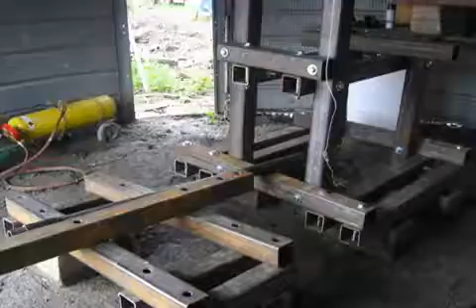Back to the topic, personal fabrication, flexible workshop. Here's our program listed in logical steps: install a metal melting furnace with about 300-pound melting capacity per hour, cast structural steel frame tubing for LifeTrac, cast frame parts for the CEB press.

Cast steam engine blocks. Use the RepRap 3D open source printer in plastic, both to recycle plastics and to create molds for casting of fine parts, such as bushings and hydraulic motors and pumps.

Brief economic analysis shows that our labor in this is worth about $1,000 per person per day in a basic foundry turning scrap metal into useful parts. We are really talking about reducing the cost of the CEB machine tractor down to the cost of scrap metal plus labor plus fuel, which is only about 2 gallons per hour for this particular case.

Our foundry budget is about $100 to $1,000 for the above case in terms of materials to build the foundry itself.

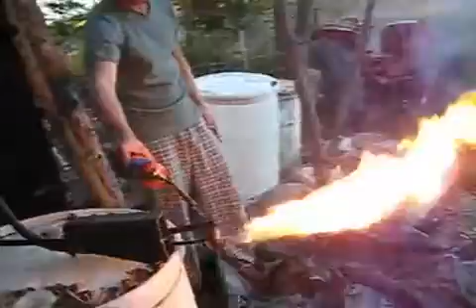We can use the Babington burner to provide the furnace heat. For structural steel, we may be able to use castings directly, such as for the frame of LifeTrac.

For a steam engine, we would have to use a lathe to bore out the cylinder.

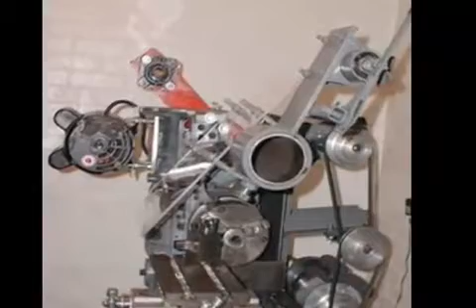The multi-machine is an existing open source tool. It's a universal machining tool which relies on the fact that in any machining operation, either the tool or the workpiece rotates. The multi-machine allows this and thus is very flexible.

We are considering an even more simple turning lathe. Combine our motor mounting, which we've experienced with a LifeTrac rototiller, with a concrete bed with bolts, and add an XY table, tool post, and chuck, and we're done. The motor is already available as part of LifeTrac.

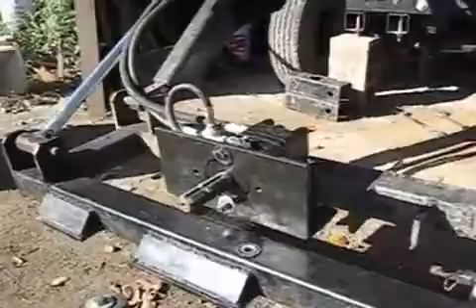This covers the industrial lathe. 20 horsepower of motor is enough to turn railcar wheels.

We can make our shaft pretty heavy, such as 2 1/4 inch, with bearings from Surplus Center at $21 each. Two of those, some metal, a $70 cross slide, and for $300 you have a heavy-duty 12-inch lathe.

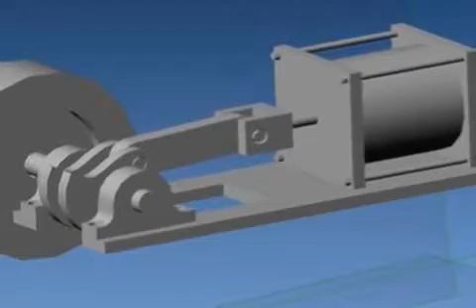See the Bill of Materials on our steam engine page, where the steam engine will be the first application of the lathe. Now, a similar procedure will be used to fabricate a production drill press and milling machine at similar cost.

Once again, LifeTrac hydraulic powered. To this, add CNC drive, computer numerical control, and Linux CNC as the open source control software that's already available.

Next, we move on to the torch table for oxyacetylene or plasma torch cutting. Instructables.com already featured a homemade plasma cutter.

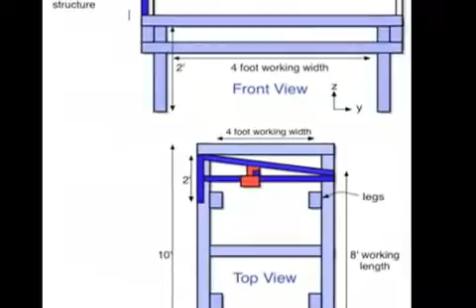On our torch table, progress is still lacking, as we're still building the workshop to house this. The torch table is designed for us to cut all the metal from stock, and in conjunction with casting, provides robust fabrication capacity.

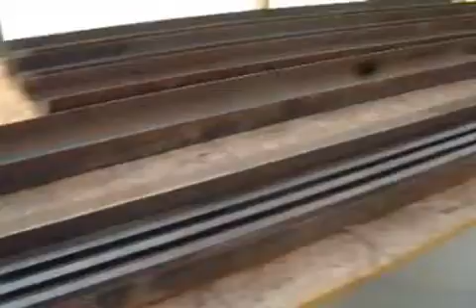Now, with the above, we're looking at 20-hour fabrication times for the CEB machine, and 40-hour fabrication times for the tractor kits.

This is exciting: optimizing production, open sourcing designs, so that someone could build the same fab infrastructure, download a design, and cast or cut all the same parts.

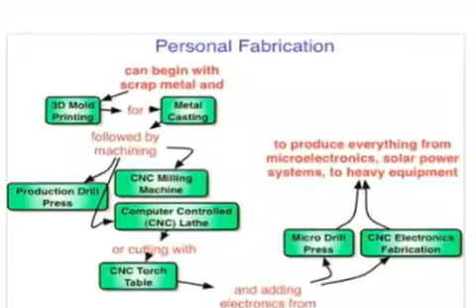This is distributed manufacturing at its best, and we think it's just around the corner for everybody who wants to do this. Last on the fabrication front, there's electronics.

Take a small, very precise version of the XYZ table, like the torch table, and you can etch circuit boards from copper-coated circuit blanks. Then use a micro drill press to drill holes for components, and you can fabricate circuits of all sorts. This is relevant to solar turbine controls, steam engine controls, inverters, chargers, wireless bridges, and many other devices.

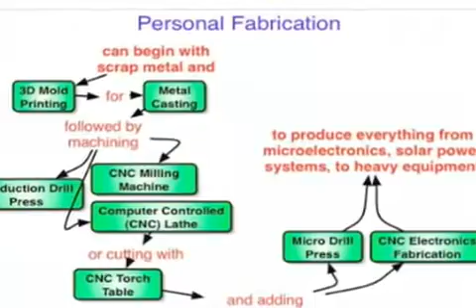Also, the micro drill press is used for drilling the itty-bitty hole in a Babington burner, which we aim to use with a solar turbine, steam power vehicles, foundry, and space heating.

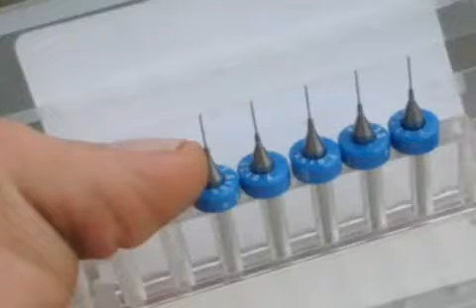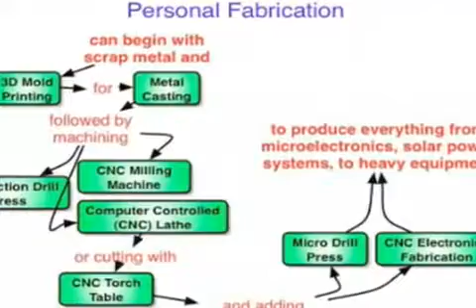Good open source 3D drawing software with a manageable learning curve is still needed as far as I know. Blender is perhaps the best one for 3D drafting and modeling, but it's hard to learn. We did our sawmill design with Blender and are now looking for a simpler 3D alternative.

Good software for machine control, such as Linux CNC, already exists, but the missing link seems to be the 3D drawing.

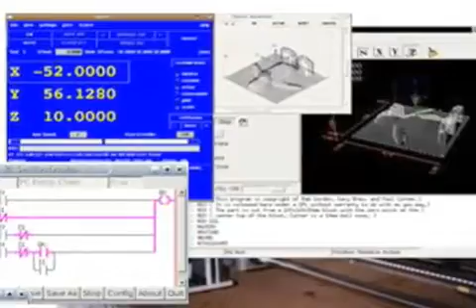Okay, to recap briefly: if we perfect our ability to melt metal efficiently, to print casting molds, and to cast useful parts, then we will have created the capacity of producing about $1,000 worth of value per person per day.

Quite significant. We combine that with subsequent computer-assisted machine shop, as well as circuit fabrication, to produce just about anything that another foundry, master fabricator, assembly plant, and electronics fabricator can produce. We can thus make anything from plows to cars, engines and pumps, bridges to wireless bridges, and so forth.

We are pioneering not the concept, but the implementation. Once this is done, open source designs become available to everybody, and such a fab workshop itself can be reproduced at the cost of scrap metal plus labor.

Then, any person who wants to do this can engage in effective production with minimum barriers to entry. Among the crew at Factor e Farm, we call this casting a new civilization at the cost of scrap metal.

That's a brief overview for the goals for the next two years. Much more details will be forthcoming.